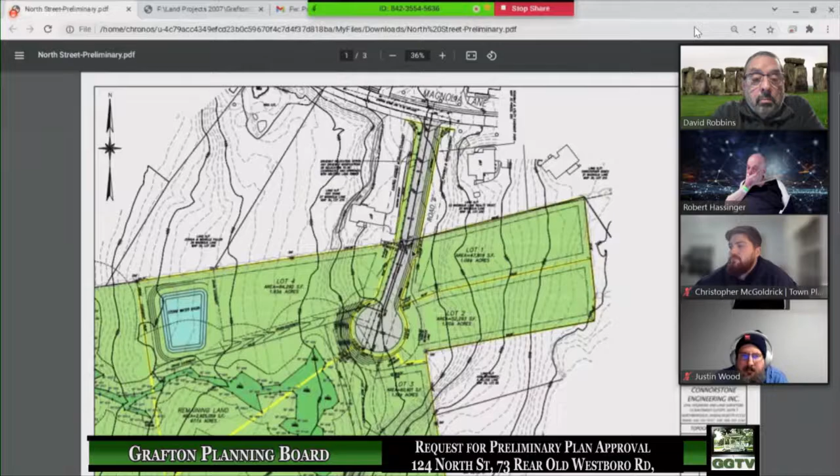Let's see if I can get the overall view of this. So the overall parcel, it was a larger piece, North Street over on the left-hand side of the page, Magnolia running down here. It's a 70-acre parcel, 73 acres about. And we're really focused in this one corner over in here for a 4-lot preliminary subdivision.

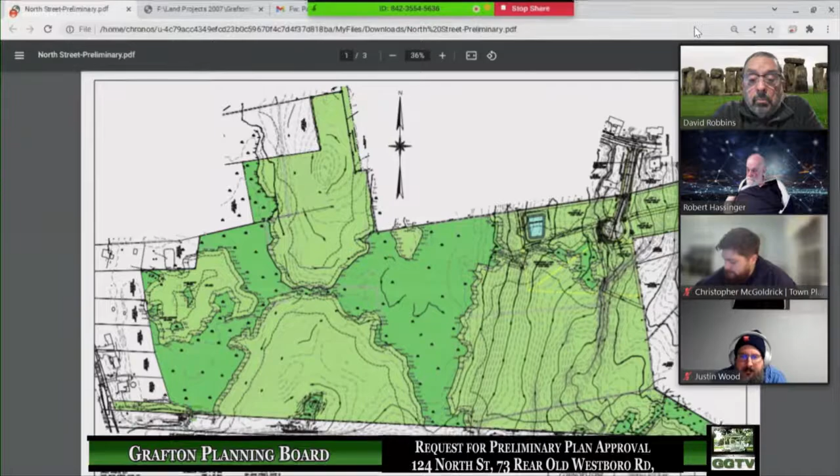So if we scroll down, this is a blown up section of that 4-lot area, lot 1, 2, 3, and 4. So we've reconfigured some of the lots. This is basically discussing that roadway potential extension. The old lot lines are shown in yellow, and the new lot lines are kind of here and in here.

I know there was discussion last time about the potential crossing of a wetland down in here. And just to avoid that, we've left it open where we could either come up and hook through, or you could still go through this area at the base of the slope. So it's one or the other. This alignment really works for both, but the primary route would be up here, and we would do some earthwork to pull that face back to allow the road through.

And as part of that, there were questions on how lots would get reconfigured in the future. So we did a little bit of an exhibit here. This would be it right now if you had the cul-de-sac. And when you went to the future extension over here on the right-hand side, it would just be a matter of giving these parcels to these abutting lots. There wouldn't have to be any land transfers between the lots themselves.

So you wouldn't need any agreements with separate landowners. It would basically just be take this yellow piece, give it to lot 2, the blue piece goes to lot 4, and the green goes to this piece. And then when the road comes through, everyone has their required frontage. Lot 3 still has its area. So it's a pretty simple configuration.

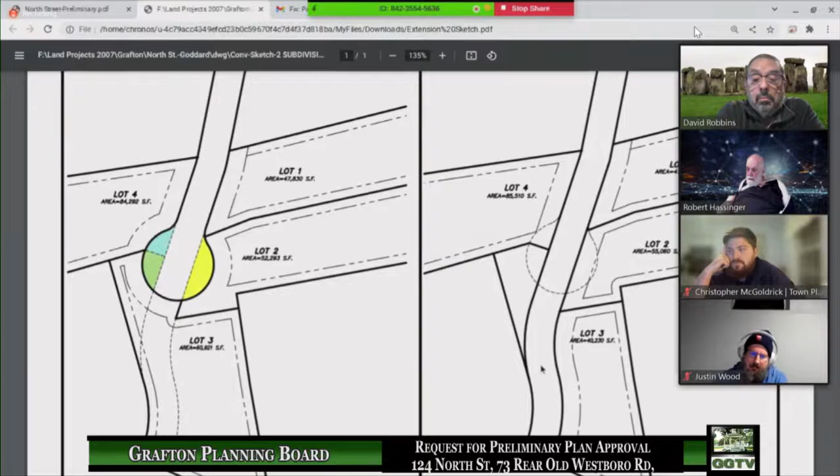I know at the last meeting there were discussions about all kinds of crazy configurations with dog legs and remnant pieces and stuff like that. This one was pretty clean because it's a straight shot in, but we did want to show how that would look in the future with the two situations. So this is the currently proposed, and this would be the future situation if that road were ever extended through.

Just a quick question on how the road extends, for lot 3 - it maintains the area? I see a difference of what is it, about 600 square feet, 700 square feet.

Yeah, so this one had 60,000 on the left-hand side in the current condition, and then we'd go down to about 40,000, just over it to meet the requisite area. Oh, I first thought that said 60,000 on the right. Okay, I'm good now, yeah.

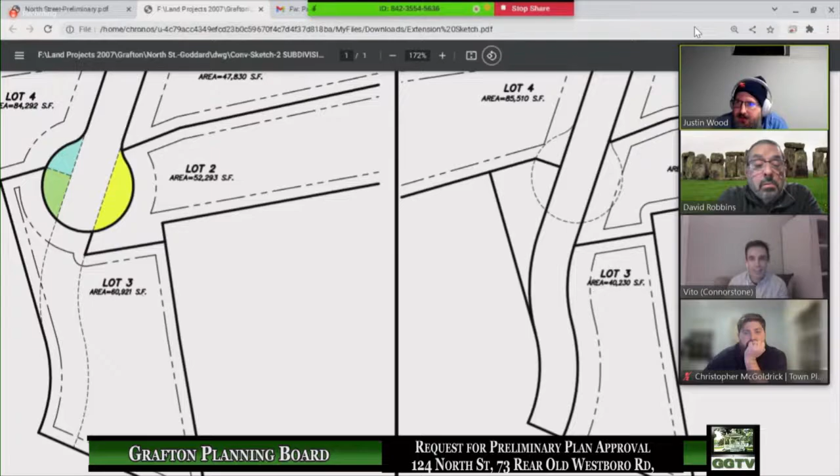And what becomes of the little triangle on the other side of the extended road here? This would most likely get given to this backland in here. So you'd still have your area here, and then that would all just be clean transfers over.

But someone already bought lot 3. Yep. And so they own... We have an easement so we can build our road, but I'm not sure they own a piece of land on the other side of the road. It could all be written into any type of agreements that, you know, when that comes through, this goes to the backland. Okay, yeah, okay.

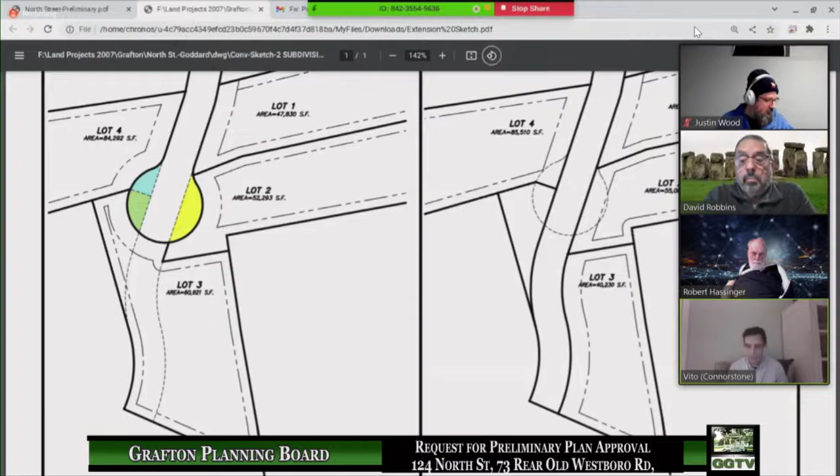All right, and then the last item was more related to the driveway up in here with the, you know, right now the existing one goes right up through over this kind of corner of the right-of-way parcel. And it was within 50 feet of the roadway entrance. So there was discussion on potential options, how that may get resolved.

George is actually on the line, and he's had some discussion with the abutting landowner's attorney, I believe. So he might be able to shed some light and go through that a little bit.

George, are you there? Sure.

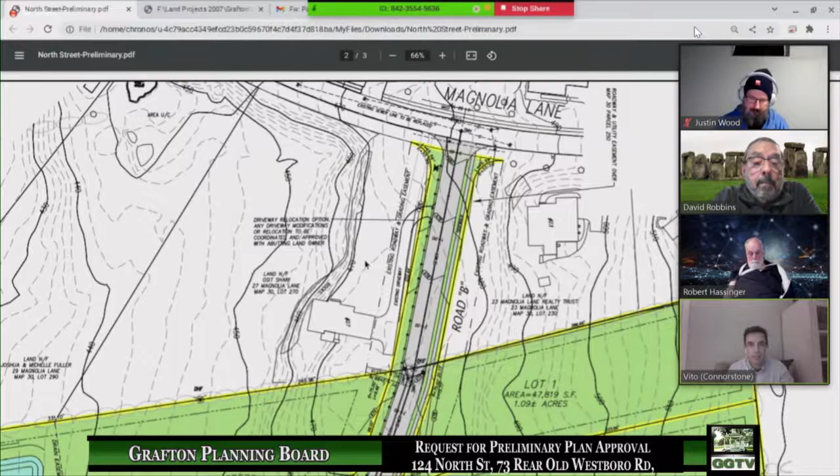Yes, I have had a letter to Attorney Helwig, who is representing that landowner relative to use of the road in the old documents that created the subdivision and the road. He has returned my call, and we have discussed how that will proceed. They have questions that we will be answering when they proffer them. We had a very good discussion, and it appears that this thing can go forward at their satisfaction. We see no problem with that whatsoever.

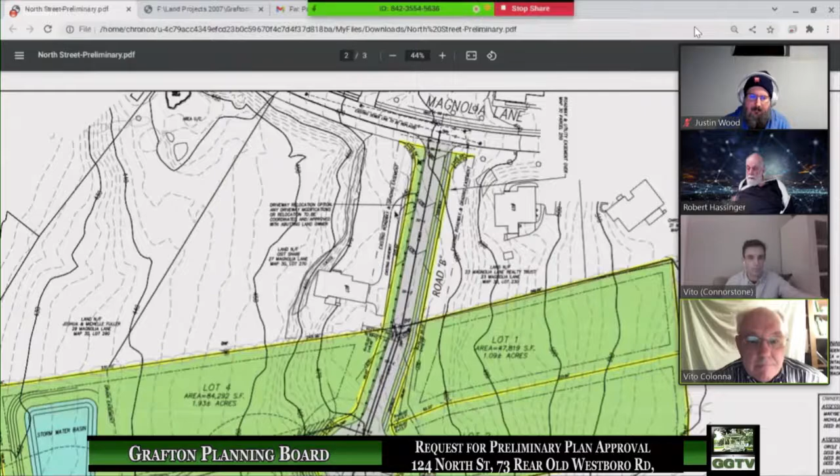Okay. Back to the extension. Have we analyzed and confirmed that the roadway, when it's extended, complies with our rules for radiuses and distances between all of that, the curves?

Yeah, it has a reverse curve that runs through here, but it complied with the regulation. I think one of them has to be double the minimum requirement. So we looked at that as far as that reverse curve that goes through there.

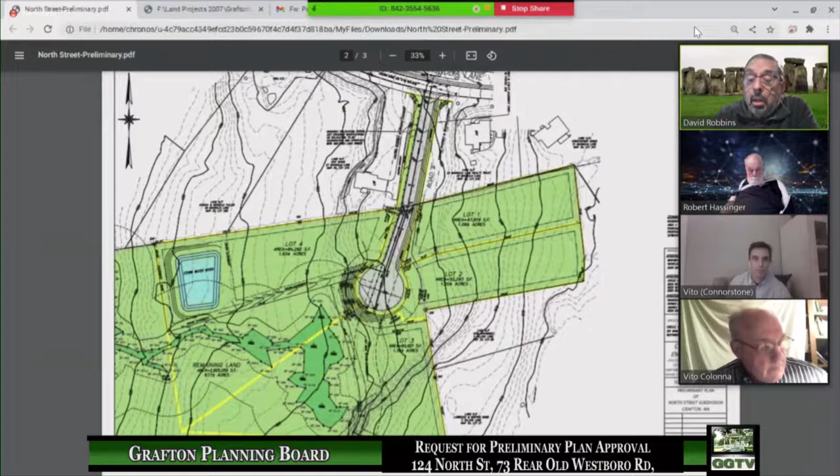Any other comments, questions from the board? Any comments or questions from the public? I see one hand raised on Zoom.

Chris, could you, oh, there we go. Hi, can you hear me? Yes.

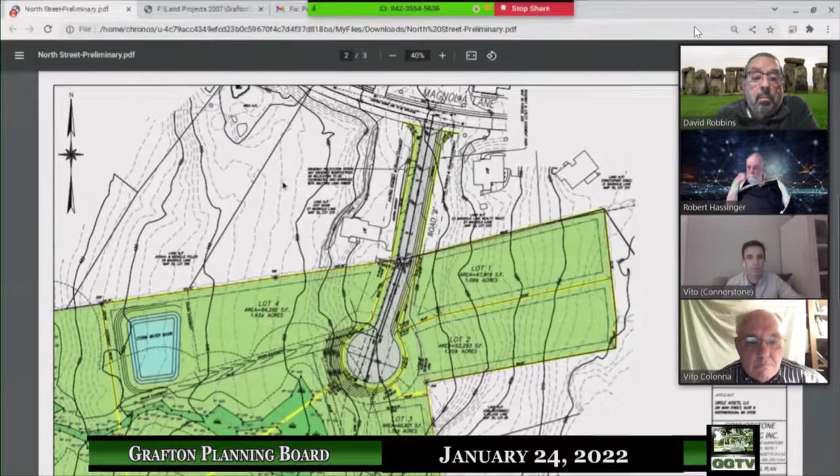My name is Kristen Marati. My wife Sherry Osit and I are the abutters at 27 Magnolia Lane. I'm just listening to this presentation, and our attorney has reached out to Scott's attorney for preliminary discussions, but we have not come to any conclusions, nor have we had any options that are to our liking on the placement of the driveway. So we've been waiting for communications, and we've gotten some, but most of the communications we've received have been very close to the days of these meetings, and we have not had adequate time to come up with an adequate solution.

That's not acceptable to us. We have not had many proposals, so I don't see how this can go forward until we iron out what is going to happen with the driveway. Right now, we have reached out to Scott's attorney, Mr. Goddard's attorney, and our attorney is in contact. But the last communication we've had is that right now we need to get together and figure out what we're going to do, what we're going to come up with. To this point, that has not happened. So I'm very concerned that if there's a vote taken on this proposal tonight, the issues that need resolution have not been resolved.

May I respond? Yes, please. I did have a conversation with Attorney Helwig sometime last week, and the conclusion was that he would send us a list of what they would want. There were two alternative diagrams, just concepts of how the driveway would go in. So we are waiting for that party to advance it.

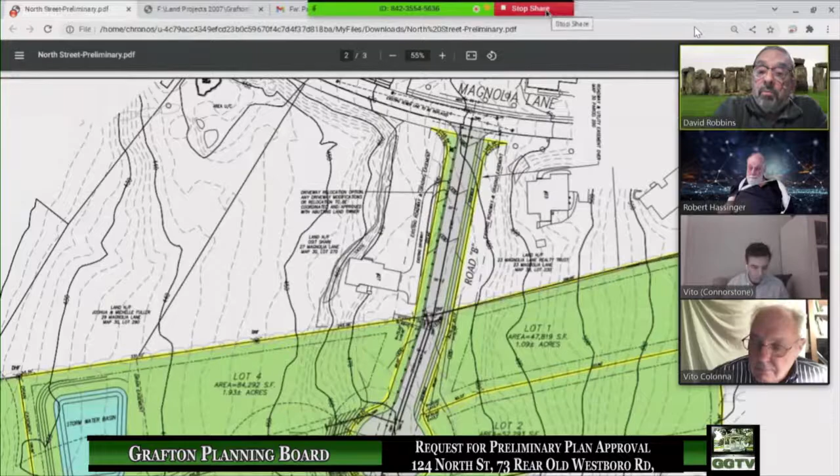Any other questions or comments from the board or the public? As far as I can tell from the discussion, the only issue outstanding at this point is the question of the driveway.

There's probably nothing to be gained by continuing the preliminary plan public hearing while the applicant and the abutter work out the details. So I move we close the hearing, and direct staff to prepare a draft decision reflecting disapproval because of this issue.

Anybody else want to second the motion? Second. Moved and seconded. Any discussion of the motion?

I'll offer for discussion — I'm Justin, less worried about it.

Can't hear you. Oops, what's going on here? I don't know what's going on. Justin's fumbling around with his mic. Yeah, he's muted. Can you hear me now?

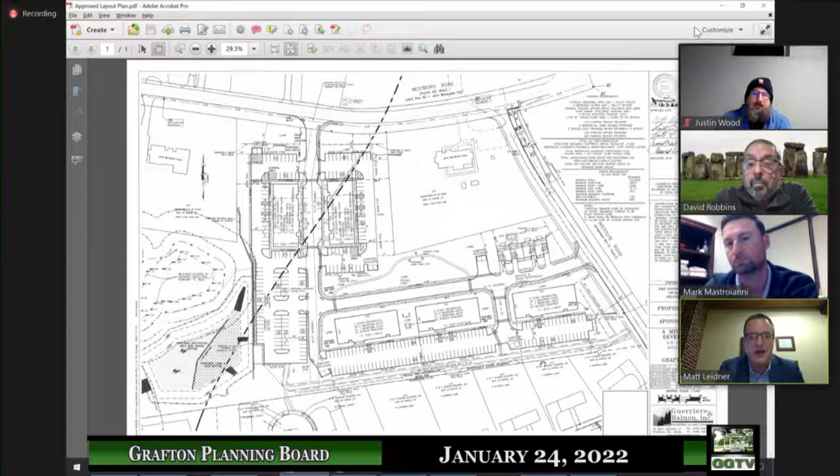Matt? Great, thank you. Good evening, Mr. Chair, board members, members of the public. Matt Leidner with Civil Design Group, civil engineer for Pulte Homes. I'll try to go through this and be fairly concise and just run through everything. Feel free to stop me along the way with any questions.

I thought the best way to go about this introduction to the proposed modifications was a very quick recap of what was previously approved by the planning board. So this is the site here, again, 100 Westboro Road. It fronts on Westboro Road at the top of the page, and Institute Road on the right side, with north up on this plan, so Institute Road is on the east side of the project. The site is approximately 16 acres.

What was approved here was a mixed-use development consisting of 5 three-story buildings: 1 and 2 close to Westboro Road, and 3, 4, 5 closer to Institute Road. The two buildings closest to Westboro Road have commercial space on the first floor, 18,000 square feet total, 9,000 in each building. Floors 2 and 3 of these buildings are residential apartment units. The 3 buildings closer to Institute Road are fully residential on all 3 floors.

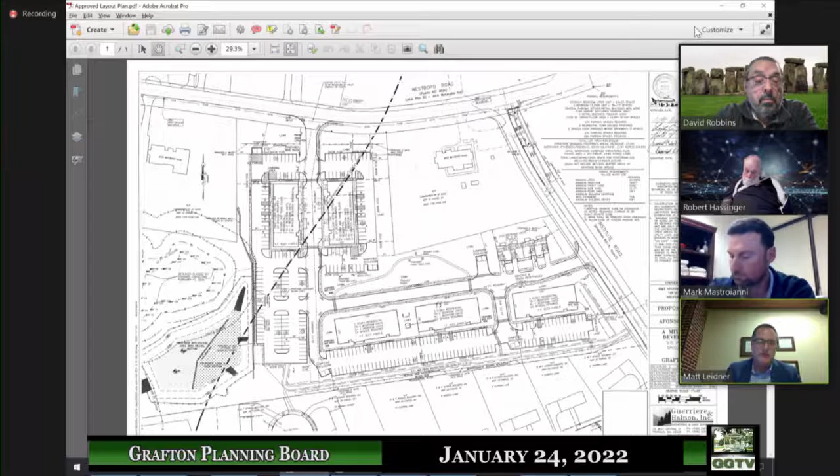So what we did is we took this approved plan, and I have here an overlay comparison plan showing in black what was approved by the planning board. The red here is also what was approved by the planning board, but what we are proposing to modify. And the green is the proposed modification.

So to walk you through that, the 2 buildings up closest to Westboro Road, footprint-wise, would remain the same as what was approved. And the square footage of commercial space in those buildings would remain the same, 18,000 square feet or 9,000 apiece. However, the proposal here would be to make these buildings 1-story buildings and solely commercial, and take the residential units that were on floors 2 and 3 of these buildings and shift those to the buildings in the back of the site, closer to Institute Road.

And take the 3 buildings, what was approved as 3 exclusively residential buildings in the back here, and consolidate those into 2 buildings. So the 3 buildings here were 3 stories. We're proposing to consolidate into 2 4-story buildings, which is allowable under zoning. That meets the height requirement under zoning.

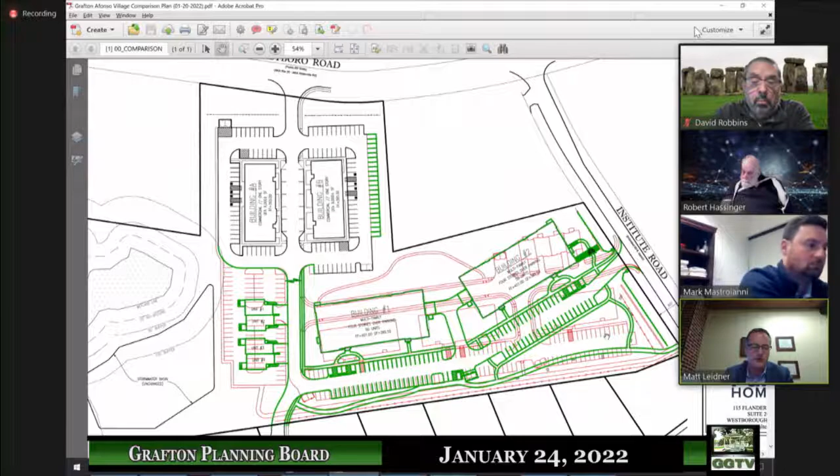So I'll just switch here. This is a rendered version of the proposed modified scenario, showing the 2 residential buildings, the townhomes, and the commercial buildings up front near Westboro Road.

From a zoning standpoint, just to go through this quickly, since the lot itself isn't changing, there's no changes to minimum lot size, frontage, lot depth, all that stays the same. As far as the front yard setback, the buildings closest to Westboro Road, there's no change proposed with those.

The front yard would be exactly consistent with what was approved. With the residential buildings here, the front yard setback, which is for multifamily, is a minimum 10 feet, maximum 30 feet.

So if I zoom into this part of the site, what we didn't want to do is have this building and the mass of it too close to Institute Road. We just did not feel that would be appropriate for this design. So what we did is set the building back - it's not way back, but it's farther back than the 30 feet from Institute Road.

We've incorporated an architectural element structure, a covered trellis structure extending toward Institute Road to within the required setback. Our plan would be to incorporate an outdoor amenity space, a seating area, walkway into that feature - provided to meet the front yard setback, but also provide an amenity associated with that feature.

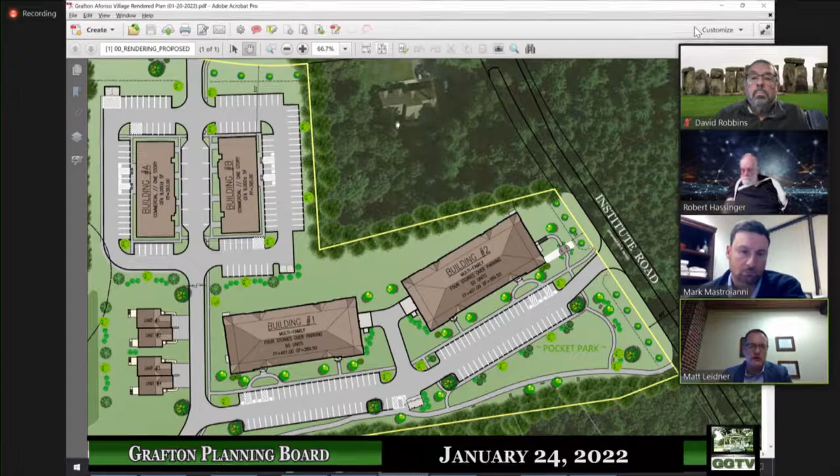So I guess just in closing here, and I'm sorry if I dragged on a little bit long, but Pulte's excited to take on this residential component of the project. And as Mark had mentioned, there are certain adjustments that they would need to see happen to the site plan in order for it to fit into their development program. But we're hoping as we go through this process that these changes are well received and actually looked at as furthering, improving upon what was approved in terms of the site plan. I'm happy to answer any questions, and the team here is happy to answer any questions.

But before I turn it back over, one of the other aspects to being here tonight, other than introducing the project to the planning board and hopefully getting some initial feedback, we'd also like to take away from this meeting what the process would be to put these changes officially forward, how we would go about submitting these back to the planning board for review and approval. So I appreciate your time, and again, happy to answer any questions. Thank you.

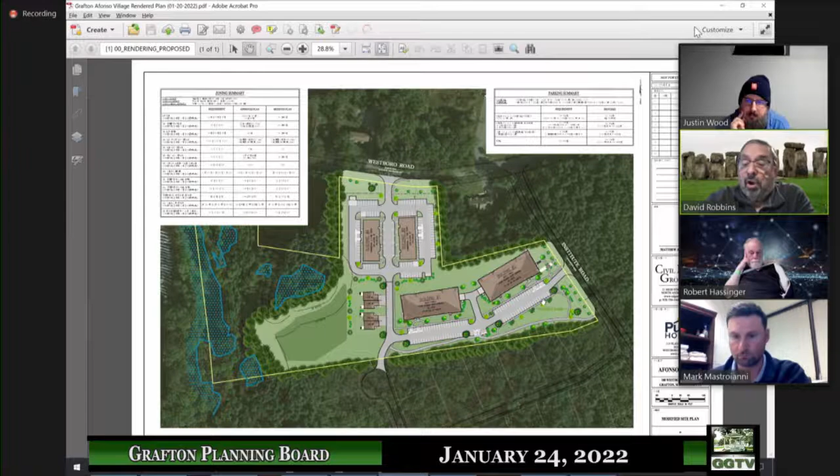Just to briefly address the process question, this looks to me like a proposed modification to the special permit, and that typically is submitted to the board through the planning office. Often a modification can be considered by the board to be minor, so the board just looks at the proposed modification, the plans, and can agree that it's a minor modification. The scope of this particular modification looks to me like the board might deem it a major modification, subject to the public hearing process.

Your best bet going forward is probably to work with Chris through the planning office to set up some idea of what materials should be submitted with the modification request. And Chris's advice may be to prepare an appropriate set of documents and submit it to the board as a modification. The board would probably schedule a public hearing and go through a process similar to what we did when we reviewed the project initially. But unless anybody else on the board has comments on that process question, I'd say going forward you work with Chris on the details. Chris, you have any thoughts on that?

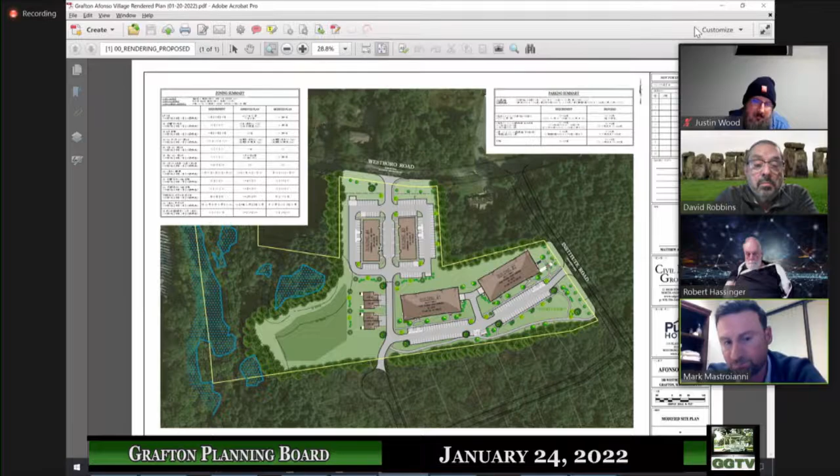Now, the detail that I wanted to bring up and get further feedback is, you can see where Matt's cursor is. There's a proposed emergency access gate there in between the commercial retail center component and the residential component. Our vision was that it would be an emergency access gate, with no day-to-day throughway or traffic between those components. So basically the residential community would all drive out through Institute Road, and the retail commercial component would enter and exit through Westboro Road and not cut through the residential neighborhoods. I'd love to share that detail with you and see if there's any feelings or thoughts on that.

I'll say I personally would not block moving forward with that in place, but I'm not in favor of it, and I'll tell you my two reasons why. Number one, as a cut through, it would be unlikely to be used by anyone outside of this development and the neighboring development, because Institute Road is just a cleaner shot to Westboro Road. The other reason is that if any residents want to partake in the commercial business in the front, they'd have to go up to Institute Road, take a left on Westboro Road, which is a generally busy street, and then cut back with another left turn to get into the commercial aspect. So, on a personal level, the downside outweighs the benefit, but I wouldn't personally block moving forward with that in place.

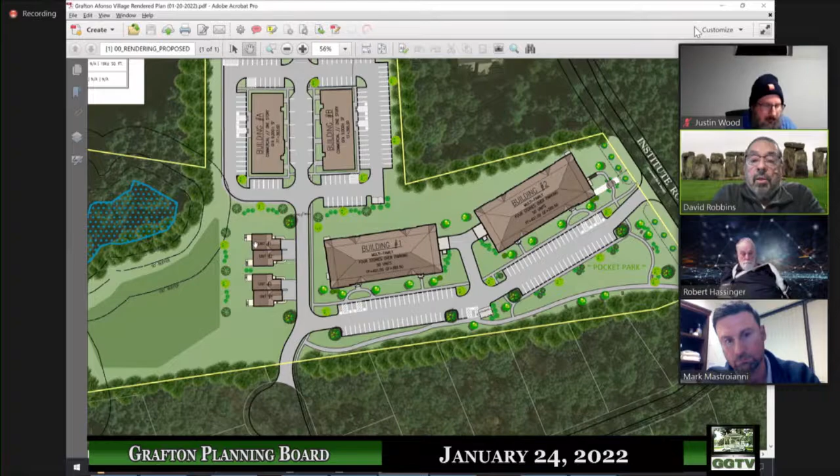And a difference, I think, between this and the prior proposal - I don't recall off the top of my head whether those 4 townhome units were to be ownership or rental. But if they were ownership, then probably one would have had to be affordable. But now that you've got 100% of these units as ownership units, it's 20% of the total that has to be affordable. And I'll point out that under this proposal, with all the units being ownership, the town does lose some unit count towards its SHI, where with the units proposed as rental, 25% of them were to be affordable, but because 25% of the rentals were affordable, 100% of them counted towards the SHI. So now this only gives us 21 units instead of 100-odd. That's just the impact on the town's SHI, but that has to be balanced by what can actually be built here under the construction costs and other considerations.

I can double check, but I believe the regulations between condo and rental mirror the DHCD regulations, so I believe at 20% condo, all the units would still count to the SHI, but I'd have to double check to make sure. Yeah, it would be interesting to clarify the impact on the SHI, because the only thing I remember is the difference between ownership and rental - I don't remember how condos are treated under that. But that's really nothing more than an observation at this point.

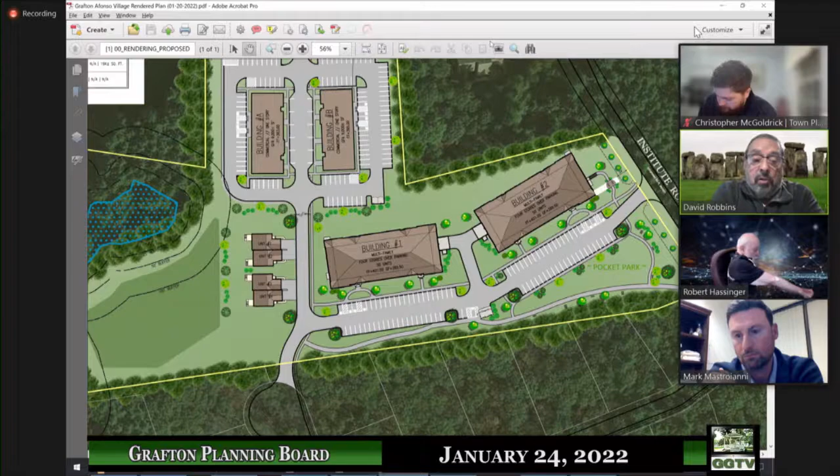And what I would say is that what we needed tonight, or what Pulte needs to feel comfortable with, is that we're in our due diligence period with Dominic Afonso and his team. So we wouldn't move forward with the major modification until we really decide that we're moving forward with the project. We wanted to come to the board tonight to present our changes and really see if there was anything we were missing, if there was a major outcry. Obviously we weren't asking for your review and approval tonight, but I'm getting the sense that as long as we follow the zoning, we'll get a lot of...